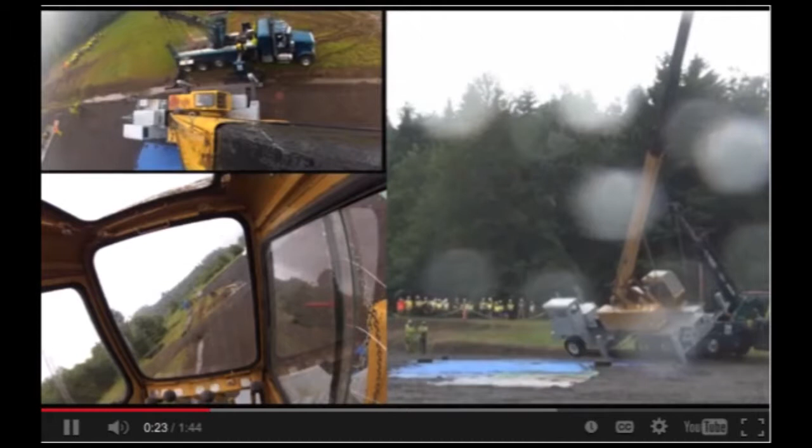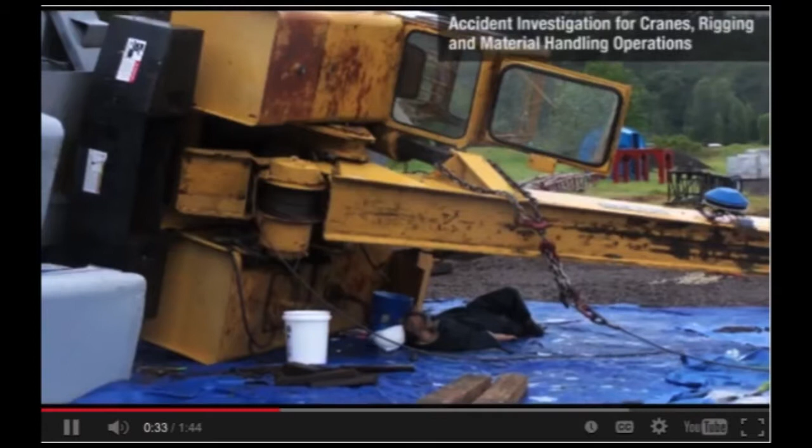This two-day course aims to educate crane and rigging managers and health and safety professionals to conduct accident investigations. Welcome to our Woodland, Washington Training Center.

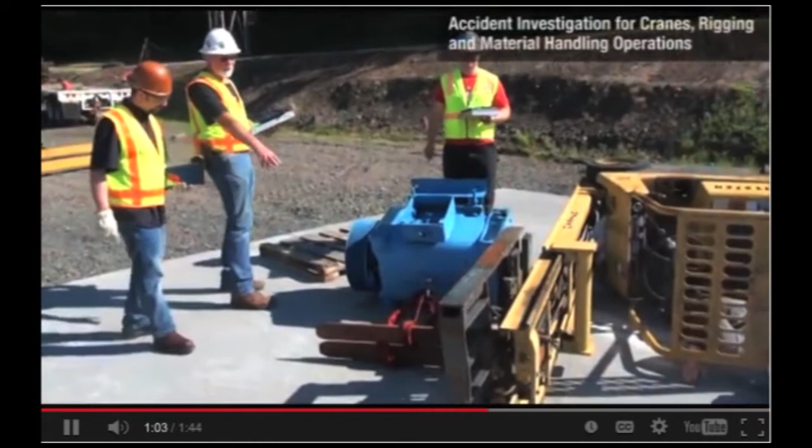ITI is proud to offer over 30 courses that improve and enhance lifting operations. Additionally, our field services team conducts numerous accident investigations each year, along with other services in our skill sets. We've built this accident investigation course with the experience and expertise in an effort to educate in-house personnel to better learn from near misses and related lifting accidents.

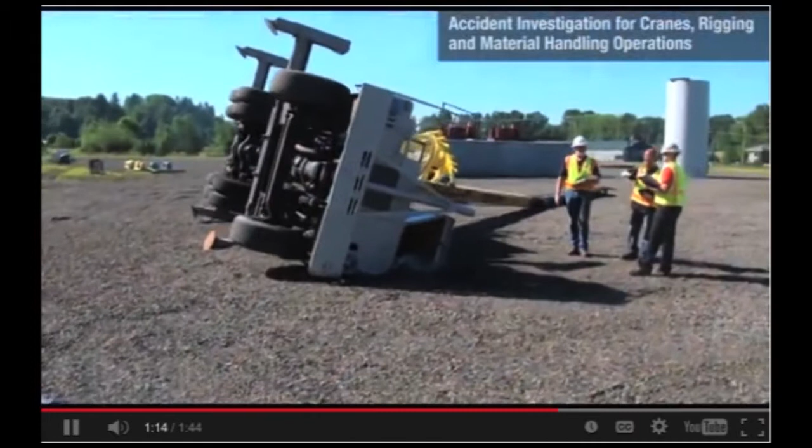At the end of the day, we hope to prove to you that ITI is unmatched in the world in its dedication to improving your people's knowledge and skill level in load handling activities. We hope to see you at an upcoming course.

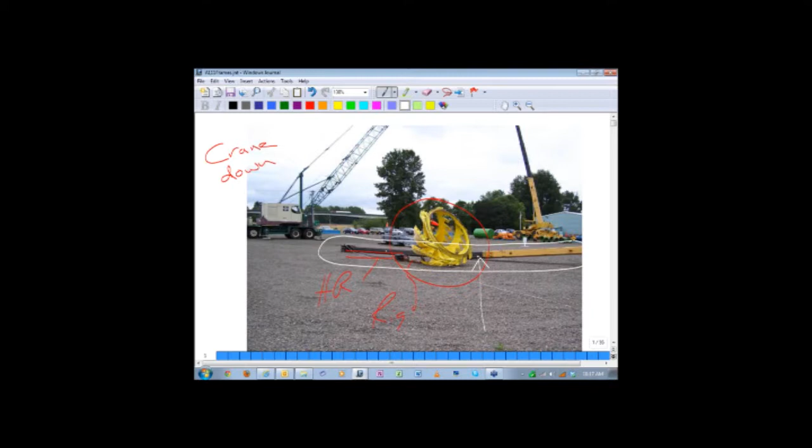So I'm going to walk through a photo set to give you an idea of the different elements. These are coming right off the contact sheets in the PDF document, both in the crane section and the rigging section. Let's take a look at number 2.

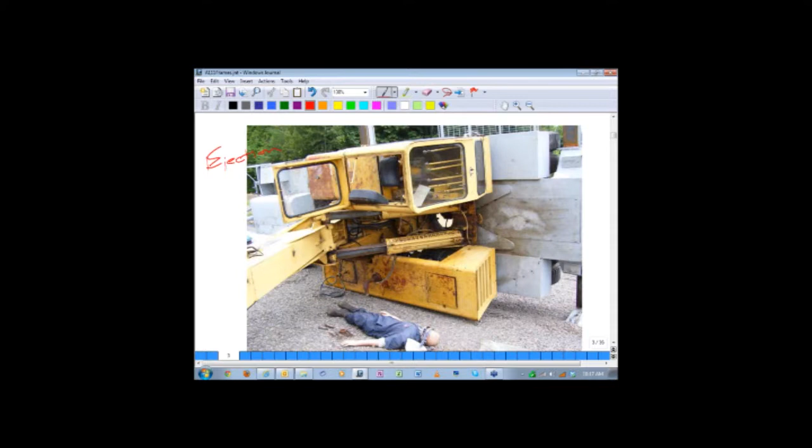This is a front-on view from the boom tip towards us on the lower right. The boom's laid down and buckled, then goes up to the machine, and the crane is on its side. This is a mannequin representing Mr. Swenson. There's broken glass on the ground that came from the side window to the operator's right. He was ejected through that side window onto the ground, and suffered fatal injuries.

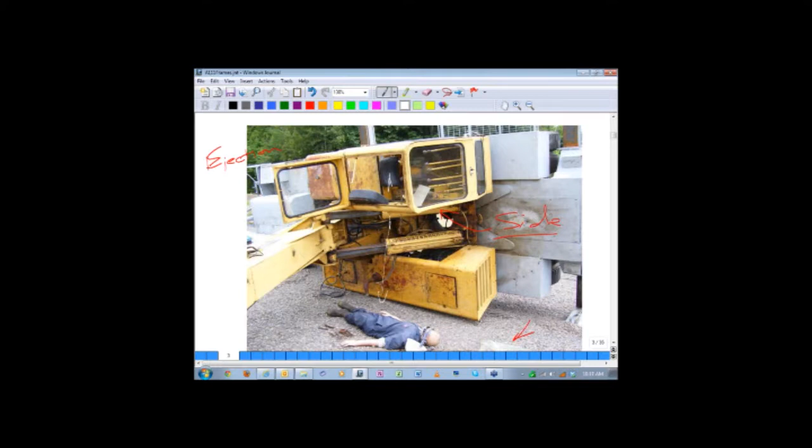One thing I want to remind you of as you conduct an accident investigation is the thinking to take large shots, medium shots, and then close-ups, so it walks you up to the evidence. It gives you perspective in series - outside, middle, and inside close-up shots - so you have a better perspective, because it's a year, two, or five years later that this may come to court. You'll want to track your pictures this way, get a perspective of what you're looking at, why it's important, make notes, and what the evidence is telling us.

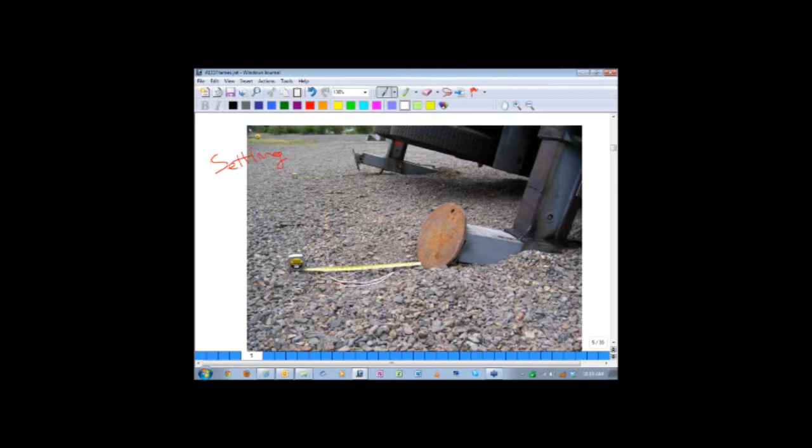So we'll go to the next one. If you'll notice, there's a depression in the ground right here - I'll draw an exaggerated swale there - and it's hard to see this one back here, but there's a swale back there too. We'll get one closer, and notice if I used a hard straight edge, we could see it starts here, comes down, and ends up, the shadow is right there. So this is all depressed, sunken ground, with an indentation of where the outrigger and the float were sitting.

Something to note when we make a remark that it appears to be sinking ground or collapsing slightly underneath the outrigger. This is something to make note of - it needs to be incorporated into the accident investigation documentation.

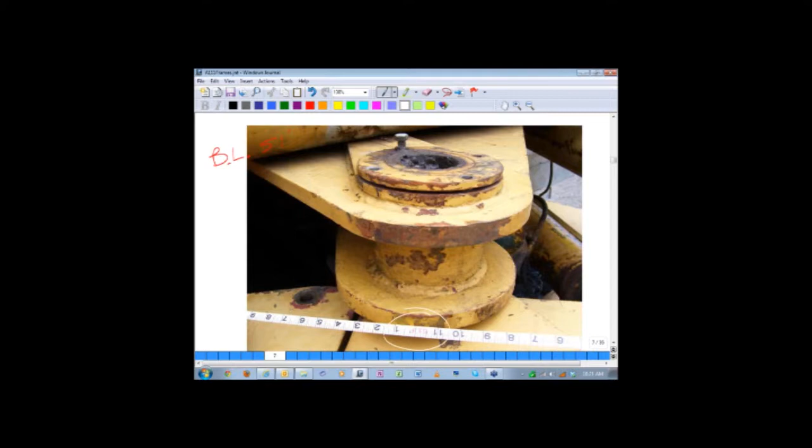This particular picture, I apologize for the out-of-focus versus in-focus issue. However, if you'll note this, I went back to the second frame here. Note this knuckle right here, right by the cab window - that is the boom heel pin, or cylinder pin. I want you to see where we're going to take you up to the heel pin location, and we have 51 feet of boom extended. So that's the boom heel pin and 51 feet.

So looking back, we have from there to there, from center pin of sheave to heel pin, we're going to make a notation of 51 feet. That's why that note is important to us.

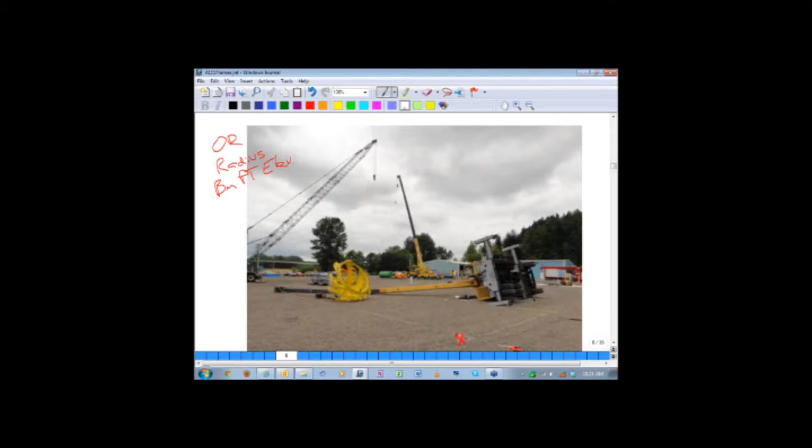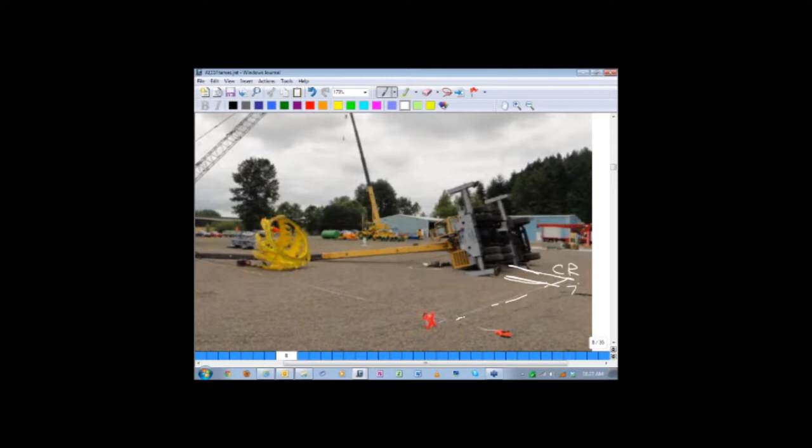All right, so then we've got a perspective here of outrigger position, radius, and boom point elevation. I made some notes to myself - down here in the lower right, let me bring this into view. What we're looking at here, we've taken a tape measure straight away from the outrigger, and the center rotation is, I believe, 7 feet from that outrigger position to center rotation. Make a note there - 7 feet - and then we continue out to try to find out what was the approximate radius. We've taken a tape down from the boom point and a tape out from the center rotation to find out two things.

We want to know what's the radius and what's the boom point elevation at approximately the time of the accident. So we're starting to run tape measures here to try to get that data. We'll see the intersect, and then get a close-up of that.

If you'd like to make a note, please do so. The boom point elevation, coming down this direction, we're going to call that 56 feet, 56 foot 6. As it comes down, there's the intersect mark for that, so it's about 56 feet boom point elevation. And radius coming out from the crane, here's 29, we're up to about 29.7 or so, an approximate 30-foot radius. We need to make those notations as well.

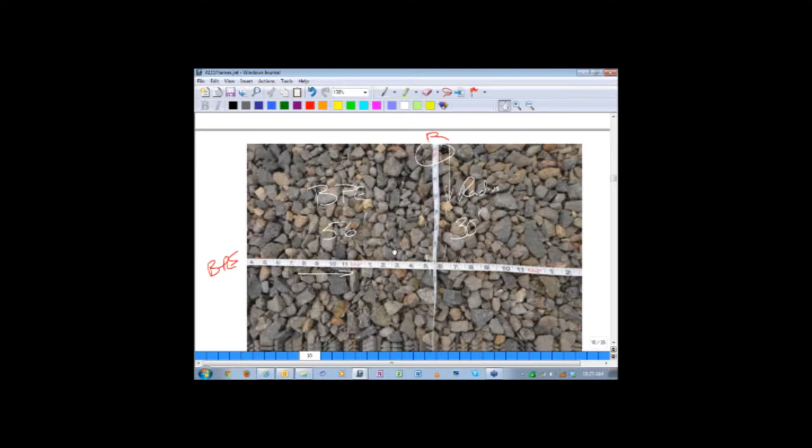Let me back out of that just a bit. So we've got some data starting to be collected here, some recording. This is a wide shot to help give us perspective.

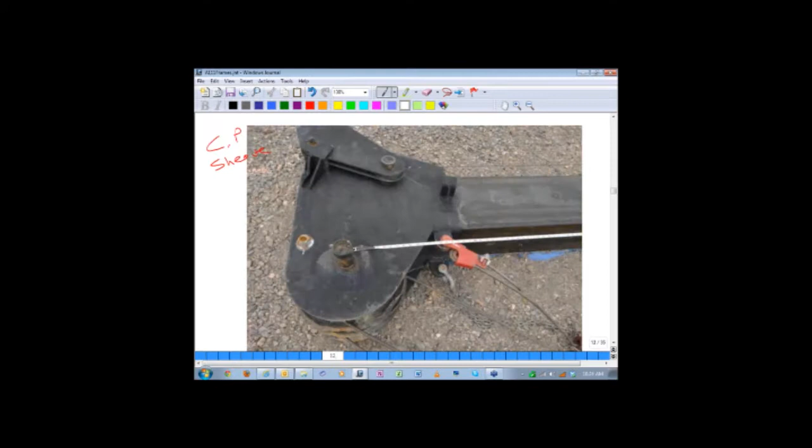We've got our radius noted, and we've got our boom point elevation, and then we have our boom length. So this is 51 feet, 56 feet, and 30 feet. We'll have the load chart, already incorporated into your document package, but we've got some data on its physical setup. Let's continue on and take a look.

Now we're going to walk down the boom. This is the center pin of the sheave, and measurements are made from heel pin to center pin, or center pin of sheave down for hoist lines. So center pin of sheave really is our key starting point. And then we're going to walk down the boom.

This boom has been spray painted marked for footage for extension. So we'll see here's 34 feet, 40 feet, 46 feet, and so on. Walk down the boom, here's 52 and 58.

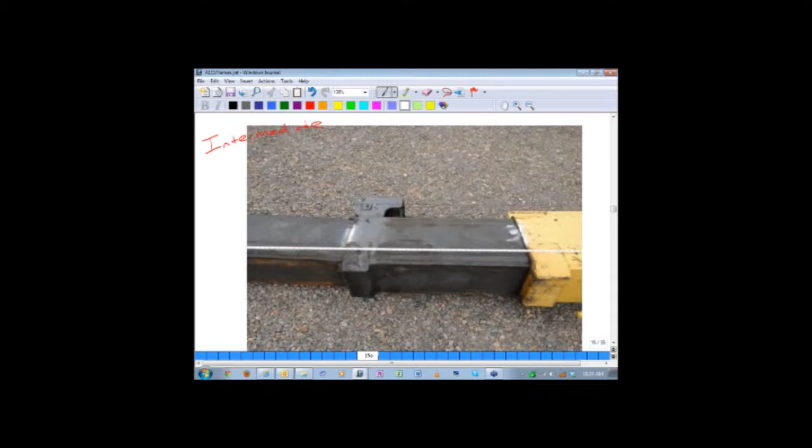But all of a sudden we get to this intermediate section. So this is the outer boom section, and this is the intermediate section, and this is the base in the yellow. So what we're seeing right here is an intermediate section that's only extended that far.

And so we have about 4 feet or so, 3 feet of that intermediate section that's extended. On this particular crane, we'll make a notation that these boom sections are unequally telescoped. On this type of crane, we'll find in the documentation by the manufacturer that they should be equally telescoped. In this case, the operator did not.

You'll notice if you take a hard look right in here, you'll see a little 3. I think that 3, if we were able to pull that out, will end up matching with this 3 that's on the outer. So when they're both telescoped equally, at that mark and back at the intermediate mark, it will be at 34 feet. Another section comes out, both equally telescoped, 40 foot's going to be showing up, then 46 feet, and so on. So we've got a boom that's not equally telescoped.

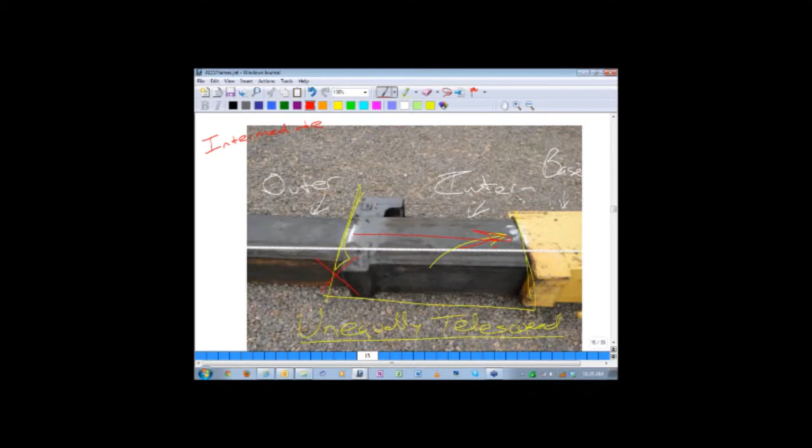What would typically happen in a gross overload, if this was fully retracted all the way back in, we might have had a failure right here just from structural failure. That didn't happen here, but it could have easily happened, and it has happened on a number of cranes where you have that smaller outer section extended, the intermediates retracted, and we end up with a failure there. That wasn't the case here, but if you had seen the boom broken there, it starts to tell a lot about what the operator setup was and the condition at the moment of failure.

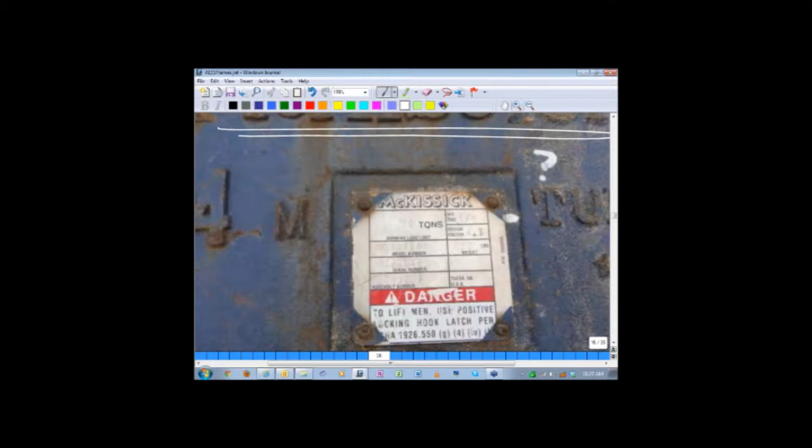Let's go on, we're going to take a look. We had a large picture of the crane block. This is a McKissick block, part of the Crosby group, and I'm going to bounce this up for us so we can have a little better data read on it. So let's please make a note there on your document.

This block weight right here is 520 pounds. The tonnage capacity, this is a 20-ton block, and the rope diameter is set up for 5/8-inch wire rope. And of course, the 4-to-1 design factor is there. We have the model number, serial number of the block, and so on.

So this block, we have data that we need to capture on this. I hope you're capturing it with me: 5/8 setup for 5/8 rope, 520-pound tare weight for the block, and 20-ton capacity for the block. Let me bounce back a couple of page magnifications here. Let's go to the next photo. Sorry about the little bit of a disturbance here with our little shaky there.

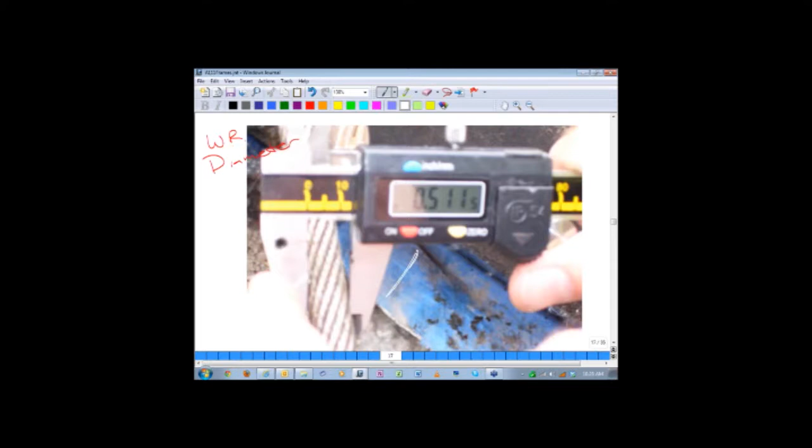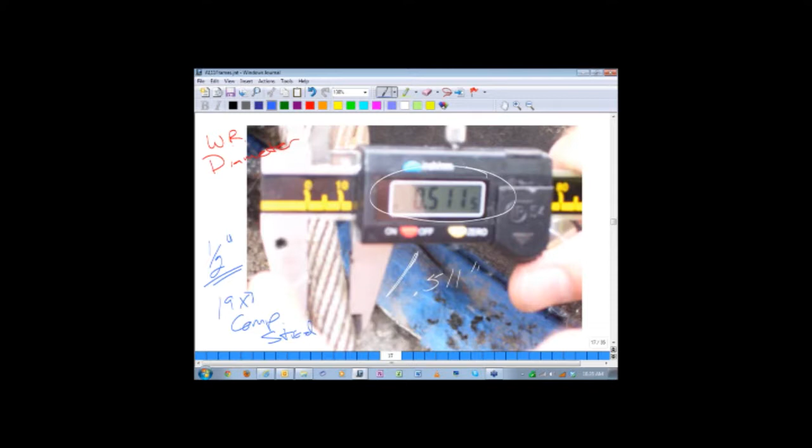0.511 diameter, and this rope is, we can tell when we made the evaluation, that it's 19 by 7 compacted strand, and it is actually 1/2 inch. So you'll remember from the block dimension information, the block is set up for 5/8 sheaves.

And the rope is 1/2 inch. So we have a mismatch right there. Somebody grabbed that block to put on the crane, may have been used for another crane, and they're running 1/2 inch rope into a 5/8 sheave system for a block. So the rope is slightly oversized, and that's acceptable up to 5%. So we're just confirming what rope did they have in place, did it match the load chart, did it match

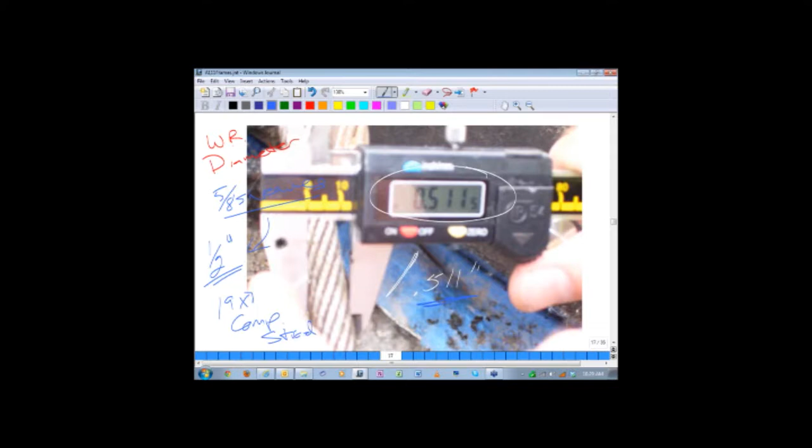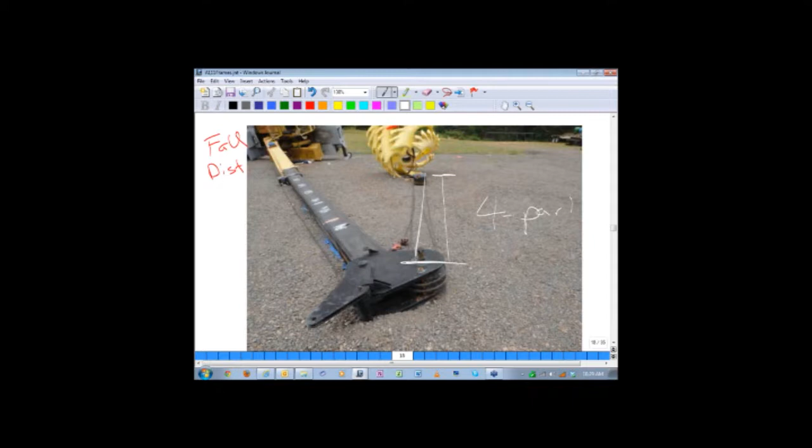the manufacturer's requirements, and what block and sheave sizes should be used. And now we already notice we have incongruity in the equipment assembly. This is a fall distance perspective, and what we've done is taken a tape measure from the center sheave pin down to the hook to see the approximate length of fall for the hoist lines. It is a 4-part system, and we'll find in just a little bit the capacity of that supporting system for 4 parts of 1/2 inch line.

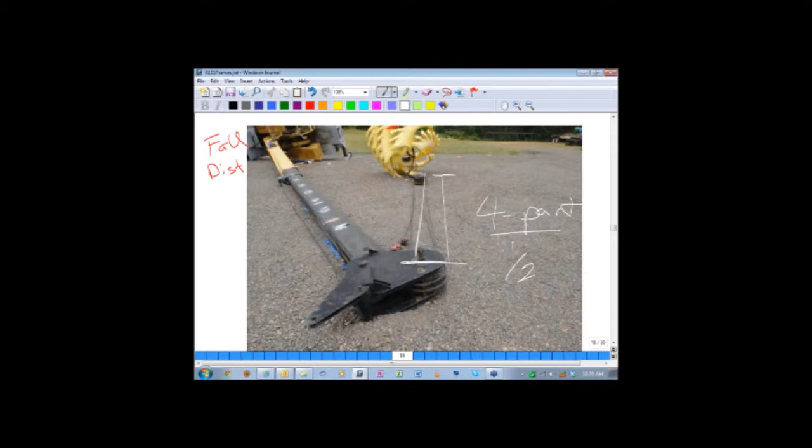And then we've got the rigging there and then the load. So let's see where our tape measure ends up, and I can see 20 feet right here and coming down to about 21, and we know our rope is slack laying on the ground, so it would be sufficient to say it's plus or minus very close to 21 foot fall distance.

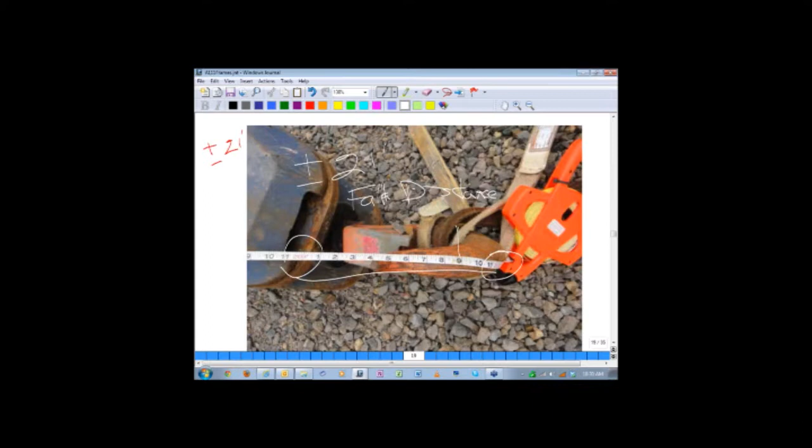And then we have the rigging to deal with and the load to deal with. So we've got 21 foot of fall there. There's our load, that's a cutter head, goes on a dredge. And you can see some slings rigged there. The load weight, we'll find out in our data, is 13,800 pounds. So let's make that recording as well.

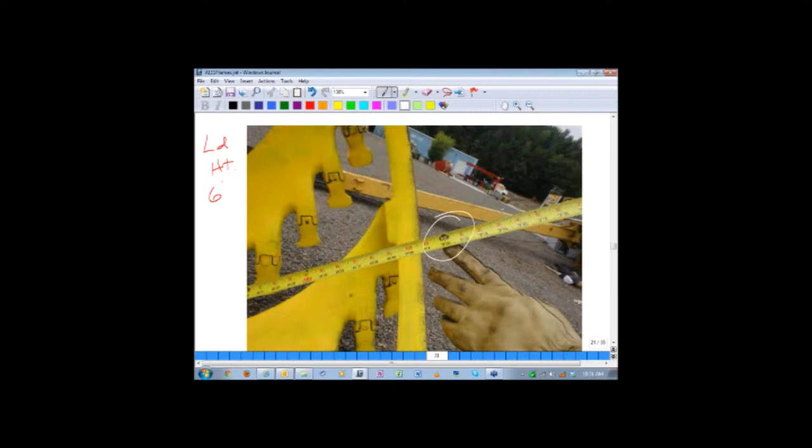I'll take you to the documents. Well, I stuck a tape measure through the load and measured it from bottom to top if it were sitting vertically. And what we found is the load's about 6 feet tall, or within an inch or so. And so we're starting to get some ideas of its overall elevation.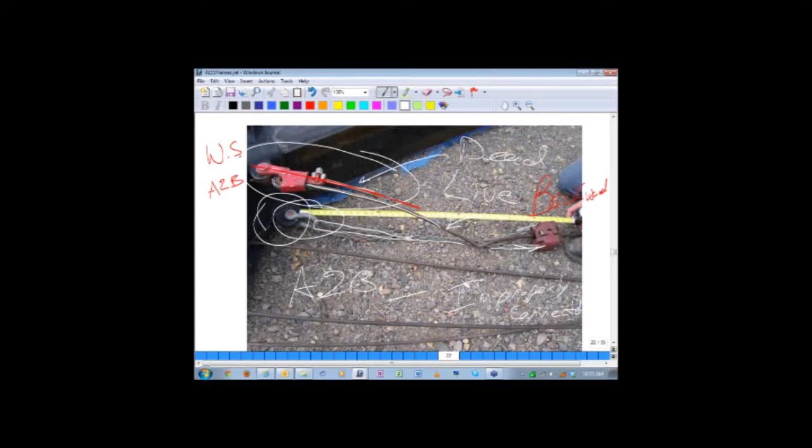So this anti-two-block device is improperly connected, and should have been connected to the A2B sensor device, so that by lightening that weight up, it would trip a sensor and stop hoisting, stop extension, or stop booming down. So it's just simply there for show, and it's really not doing anything. It's just hanging on a shackle. That shackle is just simply rigged to a pad eye right on the crane and not doing a thing for us. So we have an improper setup for our crane and our hoisting line, and our anti-two-block, it's just for pretty, it's not for function.

So let's take a look at the next photo. I'm going to back this out a little bit.

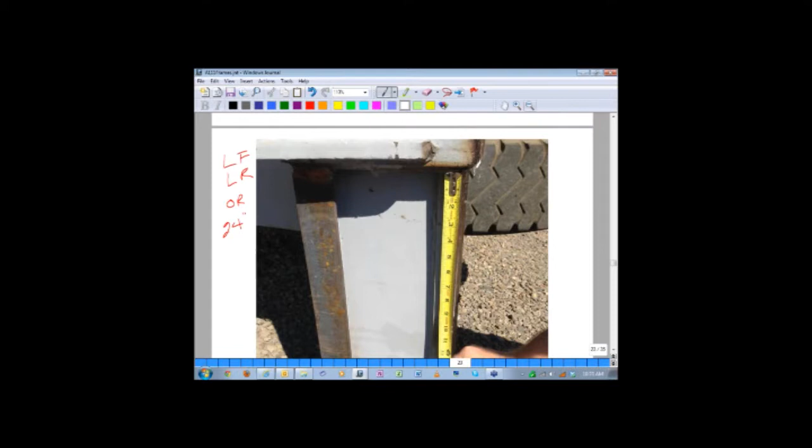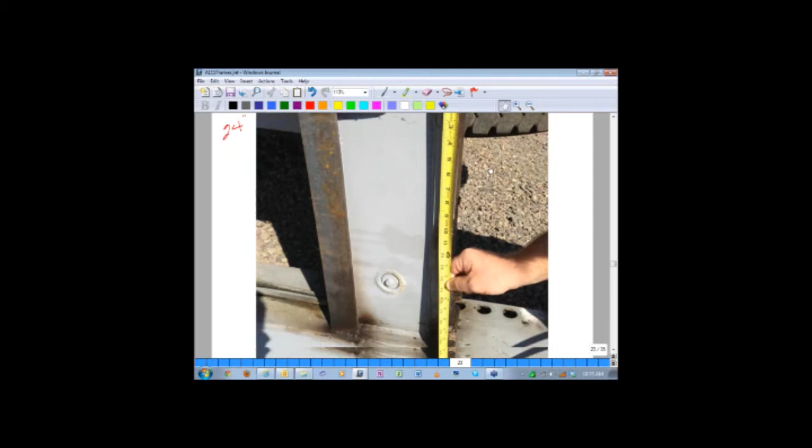Notice that this particular photo is showing the outrigger, and this is the left side outrigger set. The left side outrigger set is extended 24 inches, so we're right down here to about 24 inches for extension for that left side outrigger. This is left side, which is the fall side.

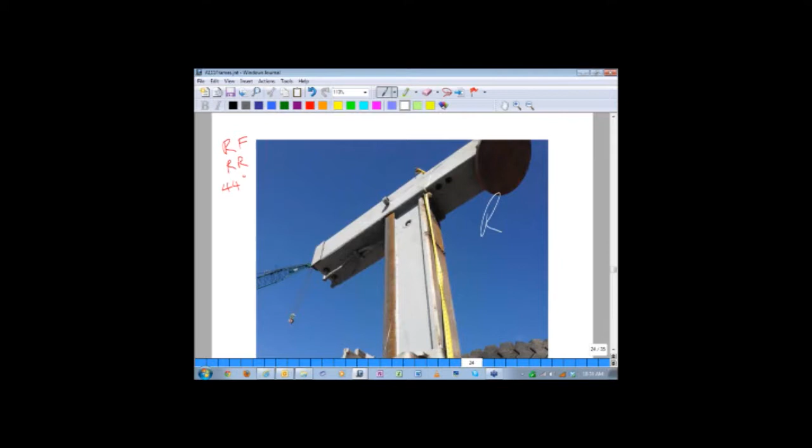Let's take a look at the next one. This is the right side, right front, right rear, up in the air overhead. Let me bring this down into view and bounce it up just a little bit for magnification. We've got 2 feet, 3 feet, here's our 4-foot mark, and we're at 44 inches of extension in the air on the right side.

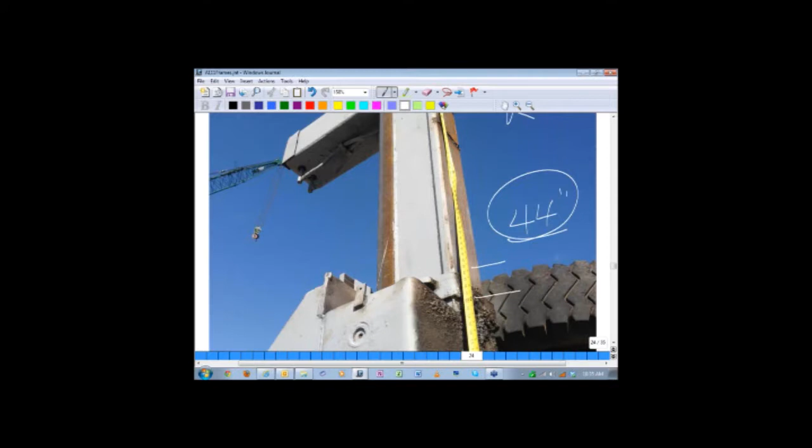That's about all that crane will do for full extension, after we review some documents. That's about full extension for that particular outrigger. So we have 44 on the away side and 24 inches on the fall side.

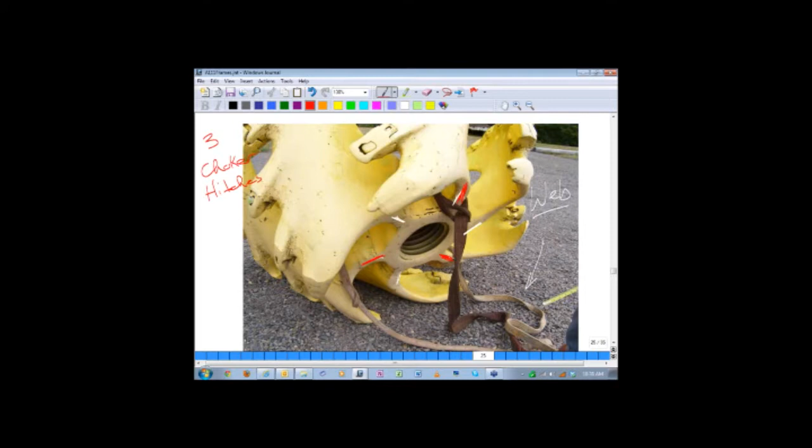Now we're going to go into a little bit more on the slings and their condition, and their method of rigging and their condition.

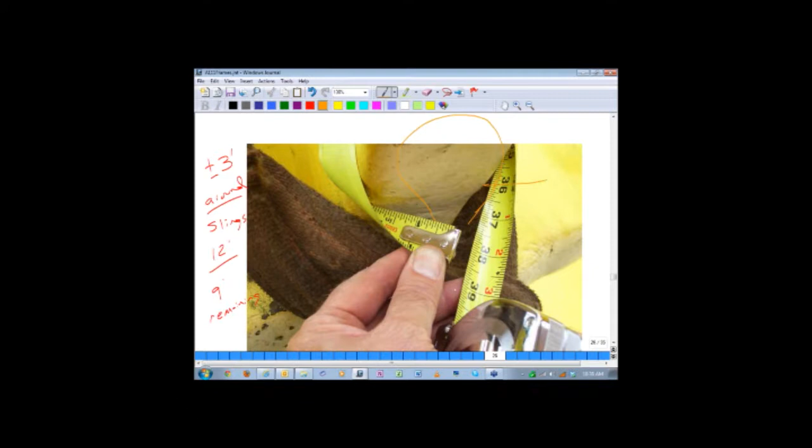Around the cutter head for the connection point, I just sent the tape around and made a big loop and went around the connection point, and it was about 3 feet, a couple inches over, depending on how tight I want to pull the tape and how tight I want to pull the sling. So we have about 3 feet around, and I made a note off to the side here. So plus or minus 3 feet around, and the slings are 12 feet in length, and that left us a 9 foot remaining.

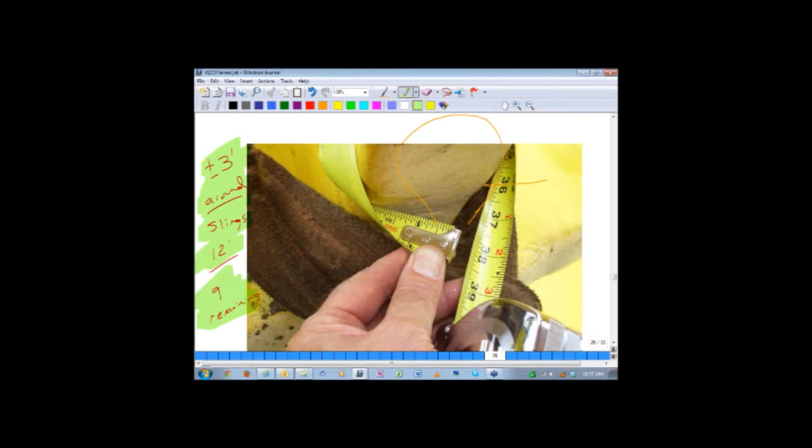Let's see what we've got so far. I'm just going to make a side note, if you would, on this page or the next one. Let's tabulate what we know so far. So the crane is set up, and this is all to scale, of course, everybody can tell that.

We have an estimated 21 feet of fall distance, 4 parts of line. We've got the block, that's down to that hook. The rigging was set up, and we have about 9 feet of slings from the top of the cutter head up to the hook, and then the cutter head height is...

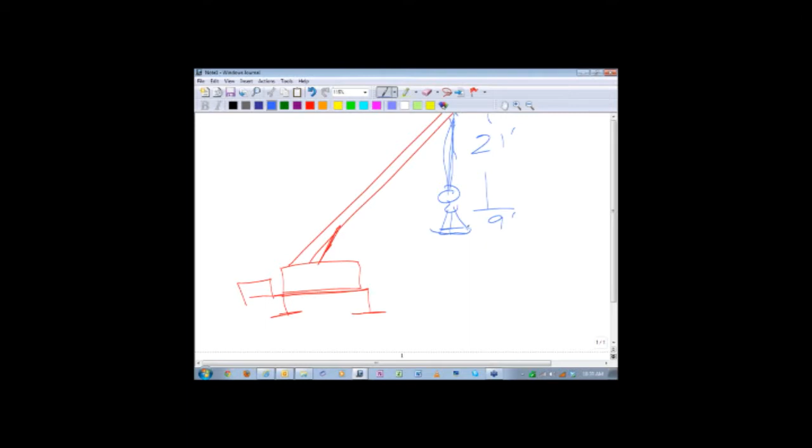6 feet. All right, so let's just add those up very quickly and see where we're at for suspended load height. So I've got 21, 9, I've got 36 feet from boom point elevation, boom point to the bottom end of the load. And if you recall, what was our overall boom point elevation from our previous evaluation? If we take this out here, it was 56 feet.

Okay, so I've got 56 feet overall and 36 feet is suspended, and we're basically 20 foot off the ground for our load suspended. When we go looking at the documents, we're going to identify there may have been really no good reason to lift the load that high off the ground, but the base of the load is 20 feet up off the ground, and the operator was working by himself, no riggers, no signal person, and the load's 20 foot high. So just as a notation, just something to keep in mind.

All right, so let's take a look. This is Sling 1, and there are actually 2 different manufacturers of the 3 slings. DCL, they've got their label on this particular sling. That's a rigging shop in Louisiana, south down in the Gulf area. This particular sling's made its way to the Carolinas and been sold there. The choker hitch capacity is 4960, something of interest to us.

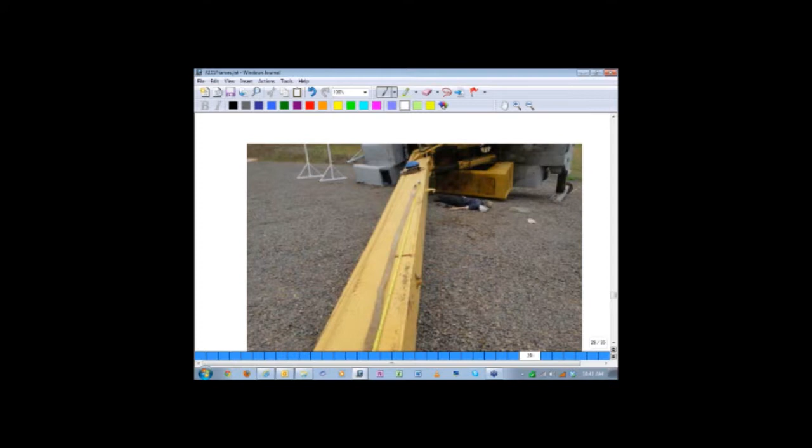So we take a look at this particular sling, and we laid it out on top of the boom and started walking down and made some notations. This looks like old damage on that sling right there. It's dirty, it's grungy, and the damage is not fresh. So basically this sling is in a rejectable state prior to use.

So we've got damaged rigging already being used in the rigging, in the crane accident. And I think what we'll find is in each case, we're going to find something wrong.

This is another DCL sling, the second sling, sling number 2, if you're tracking with me. The choker hitch capacity, this is a 3-inch 2-ply sling. It's a little bigger, rated at 13,120. Our anticipated tension was just over 4,600 pounds, something in that neighborhood based on the angle. From a capacity standpoint, that sling would have been okay.

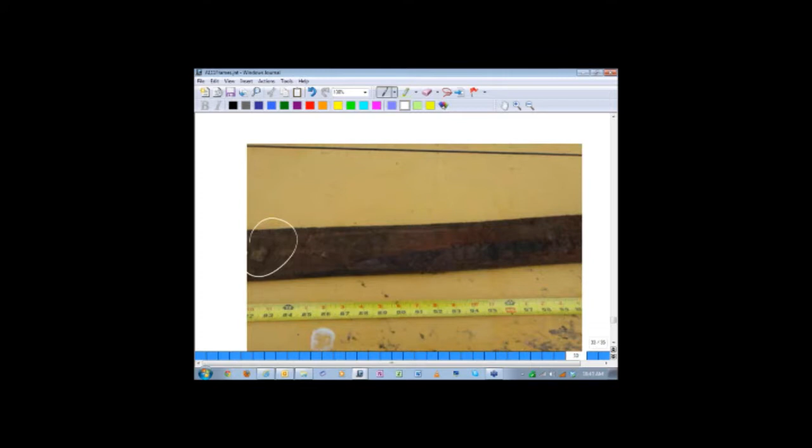However, as we do the inspection, lay that sling out on the boom, we start to see damage here. Again, that looks like old damage, not new damage. You just got to make the call on site and make the decision. Further down the body of the sling, you'll notice a very large rupture, a puncture, and what appears to be hard surface melting along the surface, but that looks old as well. So really this sling was in a rejectable state as well, though it was used in the accident.

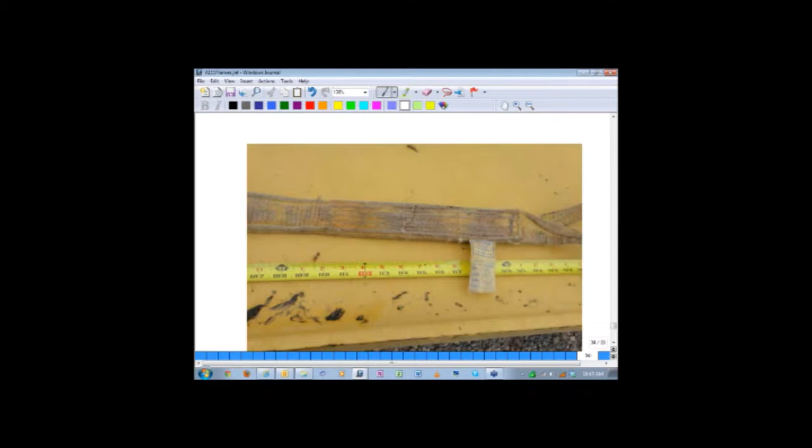The third sling has a different tag on it, and we've laid it out to take a look at. Before we change from this picture, we've got some cutting across the splice area. That doesn't look new either. The fibers are worn, they look bleached a bit, dirty, and it does not look like fresh damage. So I would suggest this sling is also rejectable based on its condition.

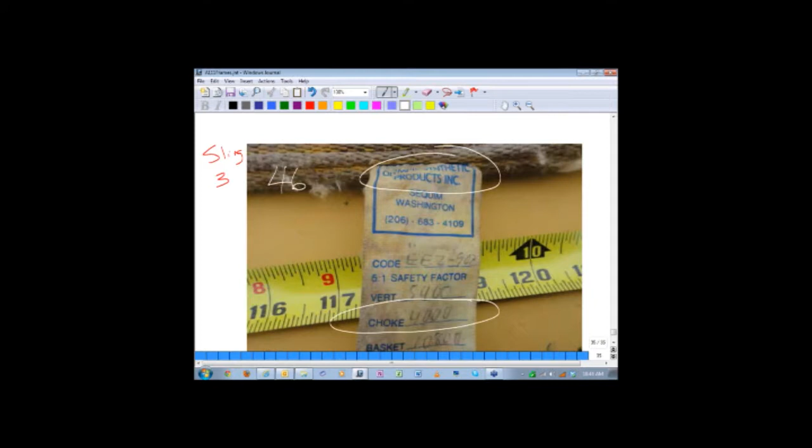Let's get some information about it as well. The company purchased this from Olympic Synthetic Products, and noted here, choker hitch 4,000 pounds. So we've got an approximate sling tension of 4,600 pounds, and we're using a sling rated at 4,000 pounds. Basically we have an overload condition, besides being damaged.

So nothing's going right for this. We're overloading the sling as well as using it in a damaged state. So our rigging really doesn't fare well, but what it does is speak to the lack of professionalism. Wouldn't we question, off to the side, the training or knowledge of rigging inspection? In this case, it would have been Jimmy Swenson, the operator, who rigged his own load.

So we've got damaged rigging, and we're overloaded on one sling. We're in a big pile of hurt here. So we've got a situation happening that's not very comfortable. Now I'm going to break away from the photo set.

So let's take this away. Now we're into your photo set that you have. We're on page 8, page 9, page 10, and we've evaluated those. Let's take a look at page 11 in your document. And this was provided by the site folks.

So I'm going to point out, let's circle or highlight some different elements here that strike us as odd or as conditions that may have contributed to this.

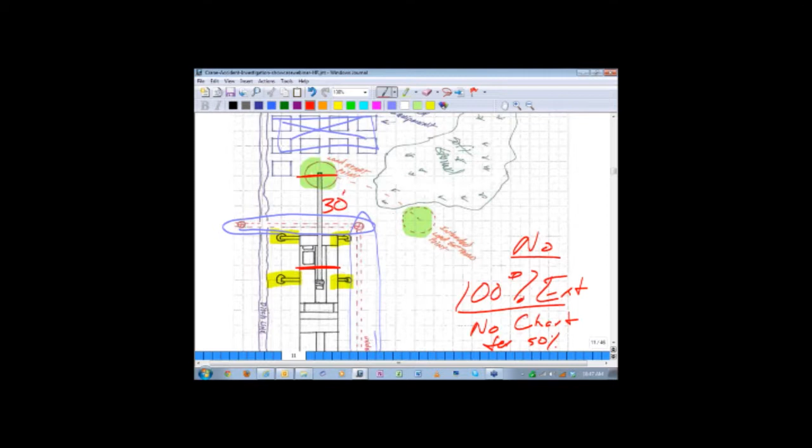Now at a 30-foot radius from here to center rotation, if that's 30 feet, it's possible that he could have reoriented the crane, arc this way for a minute, so that he could possibly have straddled that utility area and set the crane up such that he would not have been on top of it. So it's possible to do that. He could have possibly repositioned and still maintained.

And at 30 feet, he was actually—we'll see in a minute—but that radius was greater than his capacity. So likely would have needed to be in there. Could he have done it at 20 feet, set up at 20 feet, or possibly 25 feet? That's a question mark we want to look at in the evidence as we go into the load chart. So we've got ground limitations that impacted his setup decisions, and they've all led to a fatality.

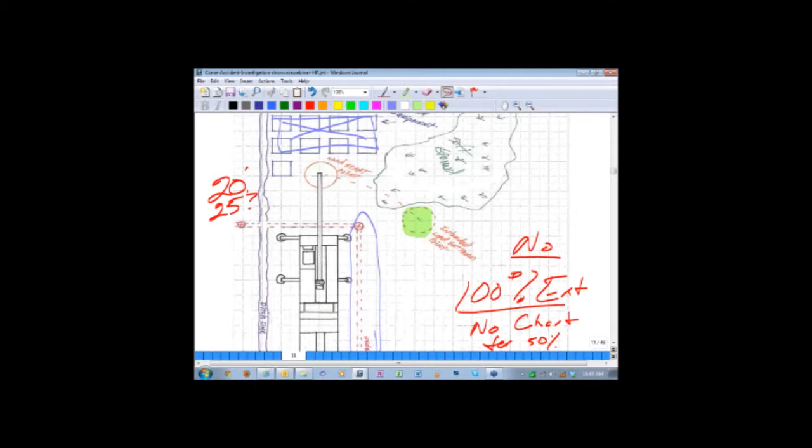As we continue the investigation and evaluation, let's go to page 12. On this page, we've been provided a shipping ticket. This is Exhibit 5, and this helps us confirm the cutter head is 13,800 pounds, provided by the company. Let's go to the next page, page 13.

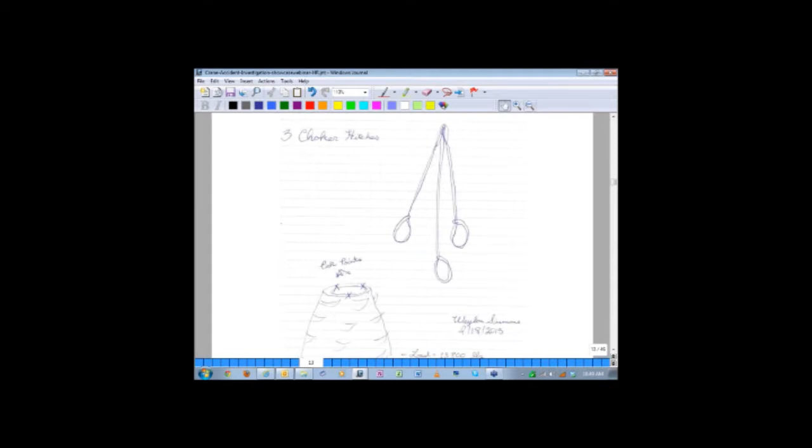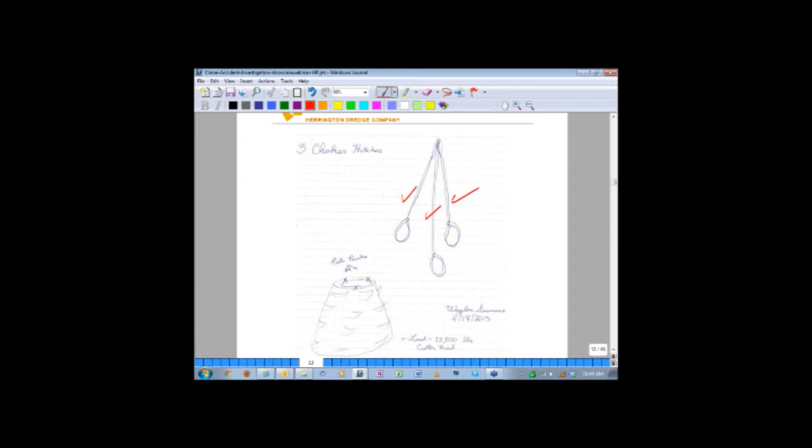Waylon Simmons is one of the yard foremen. He provided this sketch or schematic of the rigging method. We already know from our pictures and photographs that we had 3 choker hitches, 3 web slings. Pick points on the load are as they appeared, and then of course we have the 13,800-pound cutter head confirmed down there as well. So that's Exhibit 6. Let's go to Exhibit 7, which we've already evaluated—that photo set. We'll bounce through those.

Let's go to one of the first statements here, by one of the employees. Let's take a statement by a gentleman named Cletus Riley. These are taken by Mr. Gagne after the accident, as he interviewed different folks and asked them to make a narrative of what they saw and or what their activity was involved in this lift.

Mr. Riley is the yard manager, and he says, I told Jimmy to move the cutter head about 30 feet from where it was and get it out of the way. We needed to put the crane there to move some other things. He said, I told him to avoid the sewer line that runs under a couple of manholes. So he provided some direction as to where to set the crane. The cutter head needed to be moved about 30 feet, but Mr. Swenson moved the crane just up to the east and west type orientation of the sewer line, and along the west side as well.

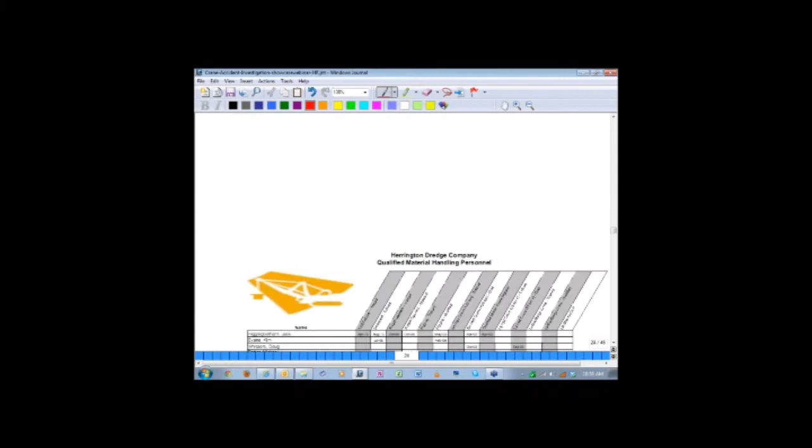Here's something very interesting on page 24 in your document. Let's take a look at that. This is a compilation. Notice right at the bottom there's a note, and what that note really indicates to us is: training dates and qualifications have been gathered over time based on in-house training activities, as the employees have been deemed qualified by Herrington Dredge Company management. Revised, John Gagne, December 14th, 2012. So what John did was collect and interview the employees and try to look for any kind of documents that would help confirm their qualification and or training.

Notice in your document that you have in hand, we've got a line item here for Swenson. So let's highlight that. Here's Swenson right here. Now let's highlight where he's qualified. We've got this column and this one, these two out here. Let's take a look and see. I'll bounce this magnification up. So let's see what we have going on there. This one is, he's a yard laborer, trained, and he's a trained deckhand. Then over in this category, he's trained for small hydraulic crane, less than 25 ton, but he's not qualified. That box is empty right there. And then the last one over, he's a qualified mobile crane signal person.

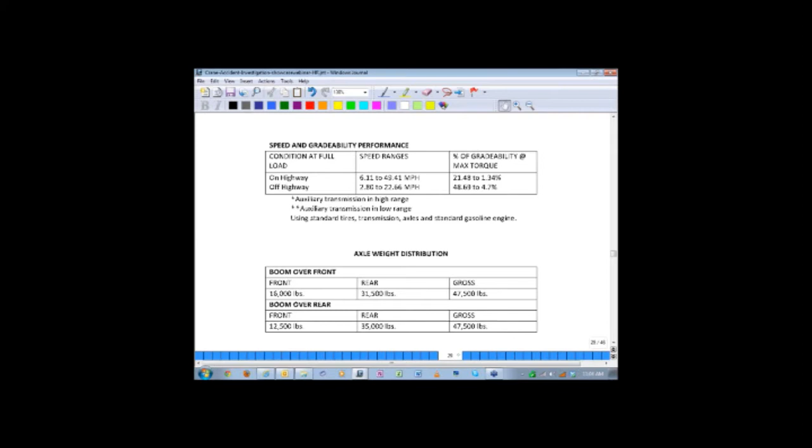And finally, we get to the load chart for the crane, and then we have a range diagram in just a minute. So let's note some things on here. I'll bounce this up on the screen just a little bit. Notice that the operator, Mr. Swenson, was working off the rear, and then he swung to his right, which would be the machine's left, in effect.

So let's do this, we'll go back up to one of the previous exhibits here real quick, let's go back to page 11 for a minute. I'm on page 29, so let's take a look at page 11. This is the setup as identified by Mr. Simmons. I'll bounce that out a little bit.

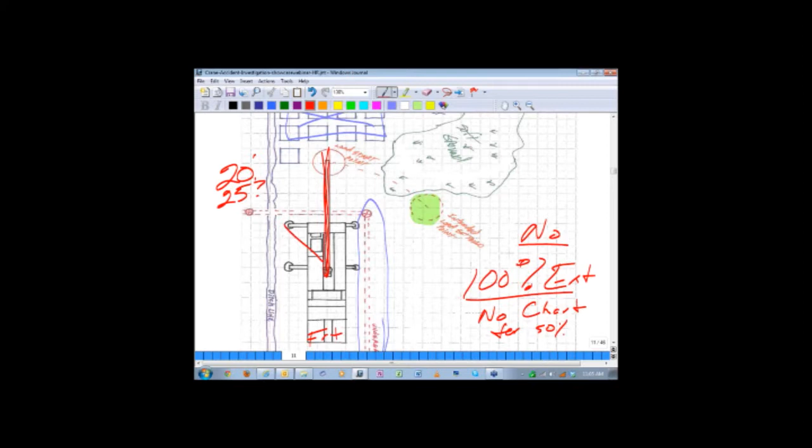So we'll notice that we're working dead off the rear of the crane, dead off the rear. Here's the front of the lower. We're working off the rear section, off of this quadrant, off the rear quadrant right in here. And then the operator was attempting to move the load to his right, to the machine's left, trying to enter into what we call the side quadrant. So going from rear to side, and the crane laid over.

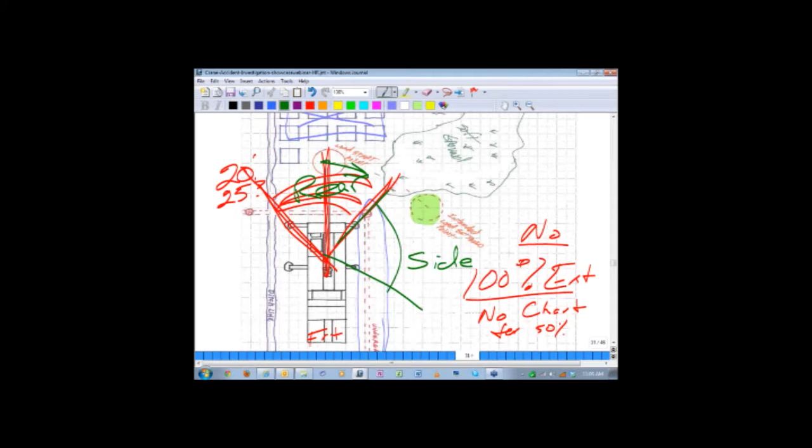So let's go back to page 29. He was in the rear quadrant and moving to the side quadrant when the accident took place. So from the rear quadrant, let's take our information based on our measurements, and let's make some notations here. We had a radius that we've measured out to be right about 30 feet.

This is the over-the-rear chart, and I'll take you down to the over-the-side chart in just a minute. So over-the-rear chart, and if you remember, the boom length was actually more than 46, right into the 52-foot range here. It was at or less than 52 feet, I think we measured 51. So when we bring those down and intersect those...

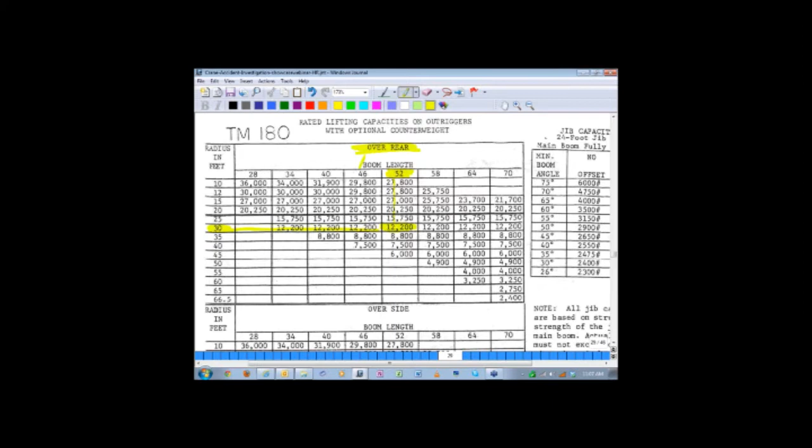Bring this across, and we find out that our gross capacity was 12,200 pounds. So we're going to note that for our investigation. Off the rear, the crane's gross capacity was 12,200. We're going to get a gross capacity in just a few minutes as we go to our investigation form.

Over the side, that's the over-the-side chart, this next chart right down here. And if we again use the 52-foot boom length and the 30-foot radius, we're going to find that we had a gross capacity of 10,200. So let's note that, and we're going to carry that forward into our investigation form.

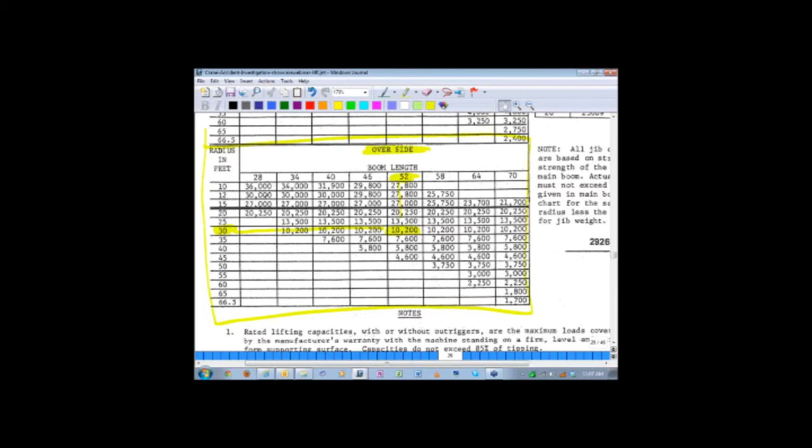One last note while we're on page 29, the fine notes down below. What we've opted to do, of course, is add all of the information up for gross suspended load. Item number 4 talks about the weights of all load handling devices. It doesn't specifically say we need to add the wire rope in this case, but we will. So we're going to be noting wire rope in our form coming up. We're going to add the block weight, add for slings, and add for payload. Those 4 items will actually end up accounting for all load handling devices and suspended load to be compared to our load chart.

One other item of interest right down here at item 10, if you'll notice that with me, I'd appreciate it. So let's take a look at item 10 and see what the instructions from Grove were. It says that all power telescoping boom sections should be extended equally at all times. Do not operate one fully extended and another fully retracted. So we know the crane was not set up properly.

Grove even gives good guidance or requirement as to what they're supposed to do and be able to use. By the way, notice it says in here single line pull is 6,000 pounds with the load chart data back that we had. So at least we were at times four again. We're at 24,000 for reeving. Okay, all right, so let's go on.

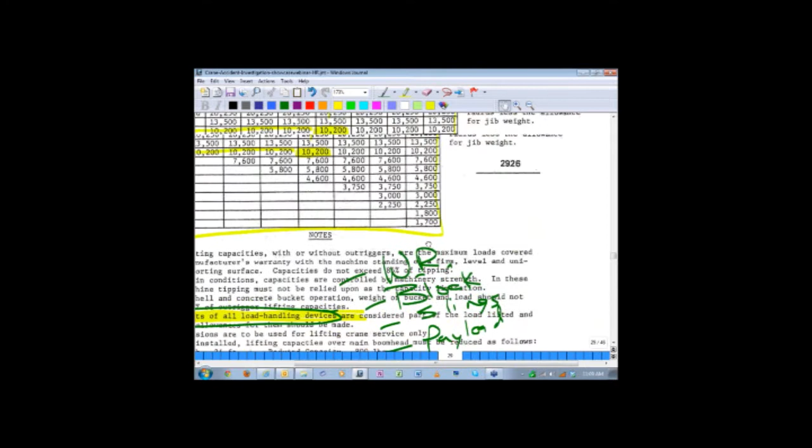By the way, on this particular page, on page 29, notice right here on the right-hand side, this is the load chart for the crane serial number 2926. So this was used for the crane, and I believe it was 2965, and we're not sure if anybody confirmed that it was exactly the same configuration, counterweight, boom sections, all that.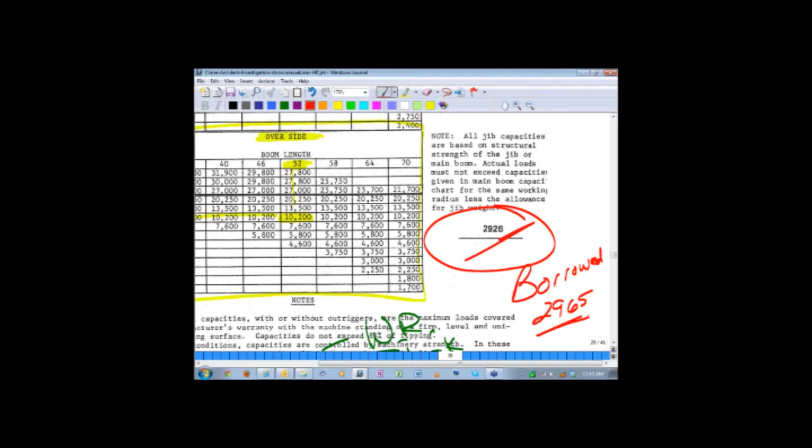It was confirmed. It may have been exact replication. We're not sure, but we're getting some mixed signals here from the load chart that's here versus the actual serial number on the crane. So that presents a challenge for us.

Page 30 shows us, and we're just about done with our investigation data, but page 30 shows us the approximate configuration of the crane when it ended up laying over. It could have been a foot or two difference in boom length, a foot or two difference in boom and radius, but in the as-is condition, we're out here at 30 feet, and we're up to about 56 foot.

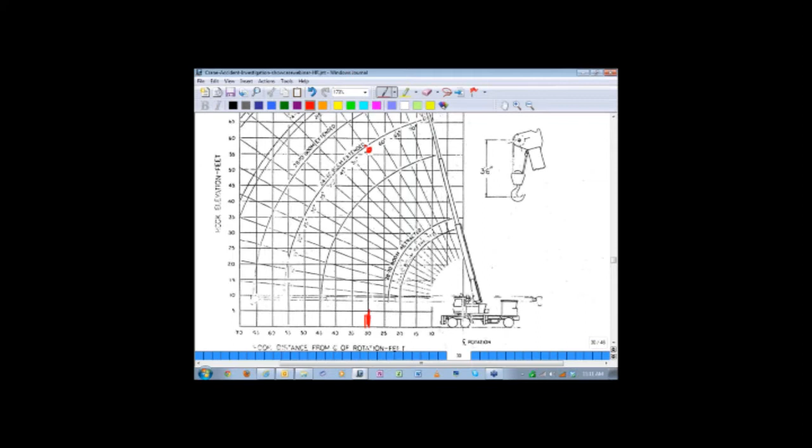I think we're at about 55 degrees. Right in here was our elevation, so 56 foot of boom point elevation, and so our boom was set up about in this position during the operation. So it's just a little bit nice to know what the range diagram provides us, that data.

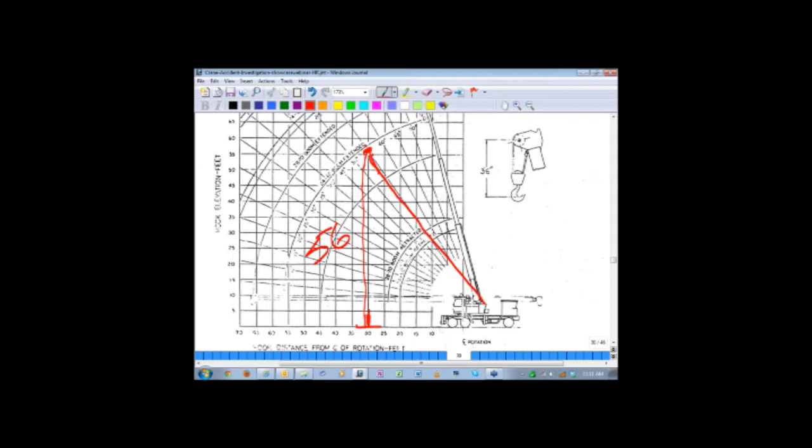This is only a help or an aid to the operator. It's not really super helpful, but this can help us understand a little bit more about upper elevation lifts and clearances and so on, but this is just a double check, and this just gives us an idea of the boom configuration during the time of the accident.

Let's take a quick look then at the inspection form for this crane, which was done, and we won't spend too much on this. However, this was performed about 20 days before the accident, so we know the condition of the crane. They also noted that it was 2926. They went off the load chart serial number, and that's how they recorded it.

We can flip to the next page there on page 32. They noted that the crane was in reasonable condition, fire extinguisher kept inside, so that was a notation. Notice on the deficiencies, no certification deficiencies were found.

However, on the last page, something of interest to us is, and I'll bounce this up a little bit, that the outrigger's box beam inside facing the hydraulic hose access is fractured approximately 1/4 inch, and the instruction from the inspector was to monitor and then repair during next PM for this machine. So it was not a tag-out condition, but they noticed a small crack or fracture.

The same basic note is made in item 2. There's a small fracture in a corner weld on the doubler plate. Again, the instruction from the inspection group was monitor and repair if needed.

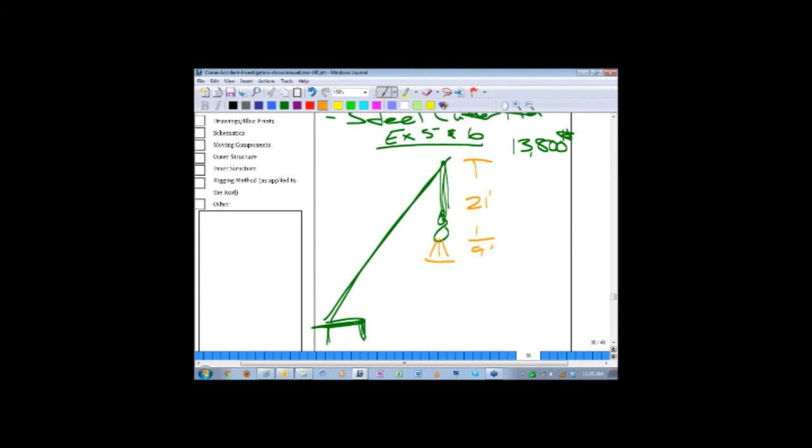and then we've got that, and the balance to the ground is 20 feet. So it gives me a little bit of understanding of the load height. I'm going to capture that in my report right here along with the load, and basically its suspension, 3 choker hitches, and no tag line, of course. Make a little note over here. 1 guy operation, so it's hard to run a tag line from the seat of the crane, isn't it?

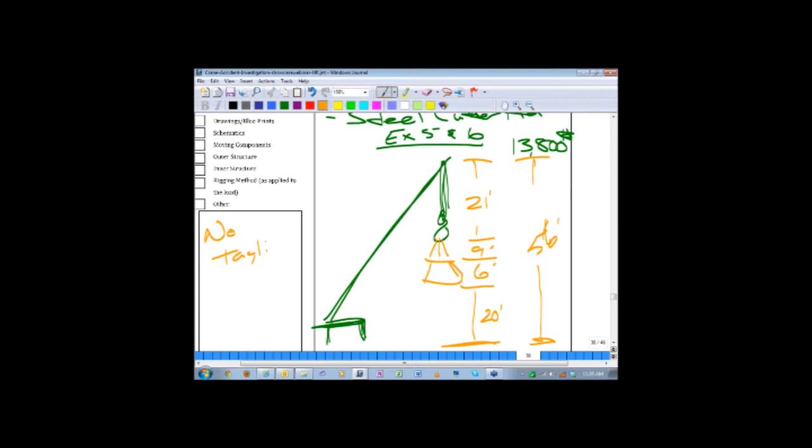All right, so let's take a look then at page 39. And as I complete my investigation form, yes, I have photographs, and yes, I have some sketches. And then personnel placement - the only person I have here is Jim Swenson that's really an active player in this. I'm going to make notations here: load path, load travel path, and personnel placement. So that's what this page is really about.

So first note I'm going to make is working off rear of machine. And then see Exhibit 4 for that data. I have a 30-foot radius at 52 foot of boom length, and at approximate 55-degree boom angle.

And I've got over the rear capacity, I'm going to make some notes here. I've got load travel path, and I'm putting the capacities here because this starts to tie the load and the crane together. So over the rear, we've got 12,200 capacity. And if I note here, I've got 14,461 divided by 12,200, and I'll share with you where that came from in a minute. That was 1.185, so we're 18.5% over the crane's capacity at that radius.

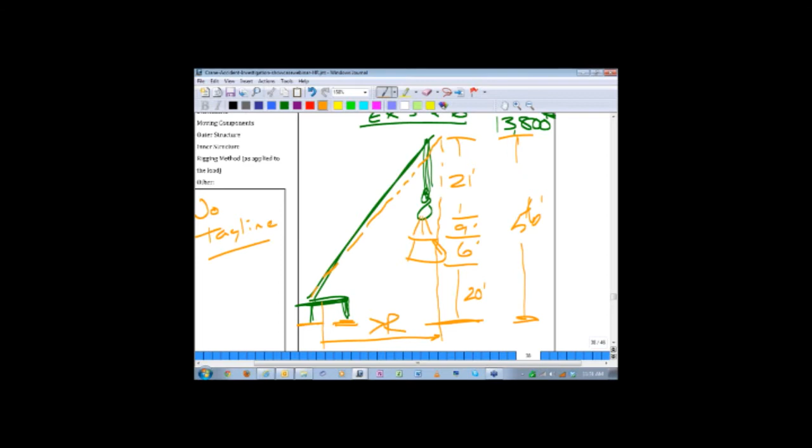Let's see, we had load swung. This is about load placement, load travel path, and personnel placement. Swung to the operator's right, and then crane tip over. And then basically we have one person, operator, rigger, serving in the same role. One person serving in both capacities. We have no signaling, no signal person, and then we have no taglines. Basically from here he's trained, not qualified. As a note, I don't have anywhere else I'm going to be able to capture that information, so it's right here where I'm going to capture it.

Let's take a look then. The last page here, I'm sorry, second to last on this particular item, is sequence of events. A lot of these were known by witness accounts, and we have Cletus Riley gave us an account, Bill Urquhart gave us an account, Johnny Scott gave us an account, and Mike Honcho gave us an account. Lance Minion was never actually interviewed, though he was stated as being noted and identified by two different people, but we don't have a witness report from him. So Cletus Riley, the sequence of events was assigned Jimmy Swenson to move the cutter head.

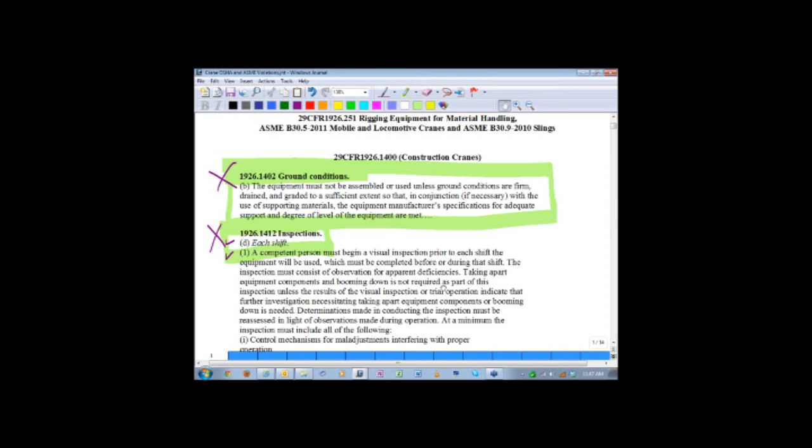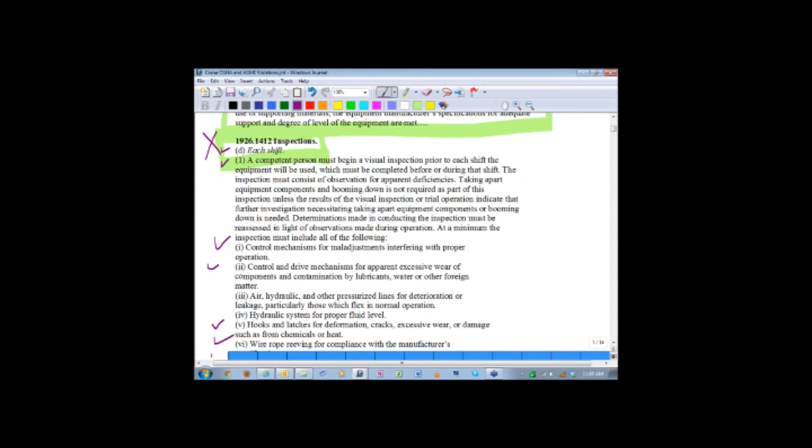What does 1402 say? 1412: each shift will do a thorough inspection of the crane, control mechanisms, hoisting system, hooks, latches, wire rope for compliance, and so on. That's when we should have caught that the block was not the proper block for that operation.

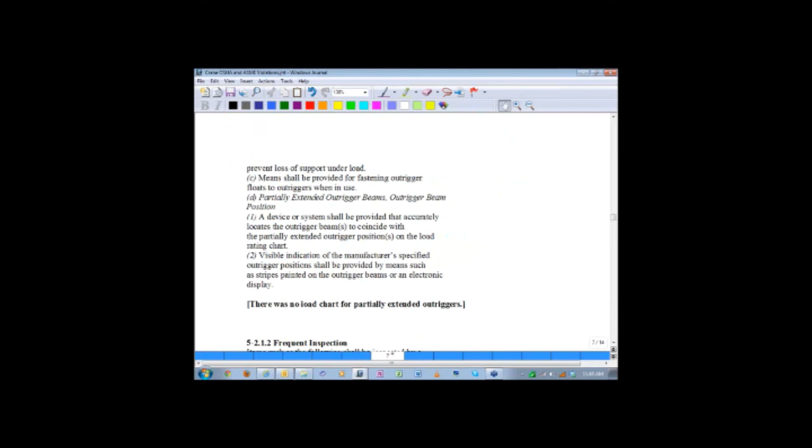So in each one of these pages, we've got all of these noted as to the infraction, its full detail, and full readout. Each one that's been noted in that root cause analysis, we've been able to quote, book, and text. What do we mean by that, and where is that indicated?

So all the way through clear to the end, sling selection through the ASME B30.9 for slings, effective rigging, or effective environment, and so on. We don't ever want to quote something just by title here without actually having access to what is the instruction, what is the criteria.

Okay, very good. Well, we've been through a good overview. Are there items that could have been caught, could have been discussed, could have been chatted about? Certainly, these are the primary items that we are of most concern about.

Jonah, I'm going to have to go ahead and turn it over to you. Looks like I've got a computer screen that just kind of wanted to go gunny sack. Why don't you grab the balance of this, and we can work on the phone with anybody that has questions or concerns.